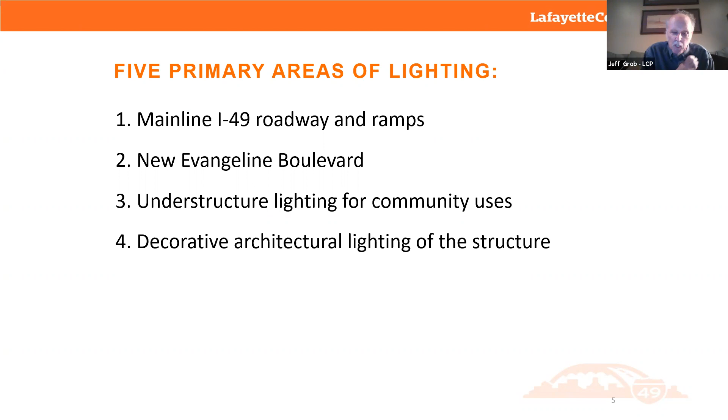We've talked a lot about decorative architectural lighting of the structure. One of the things that a signature structure allows itself is to be enhanced even further with a signature lighting scheme, and that can be done to further augment or highlight the context in which it sits.

I've seen signature bridges used for all different kinds of purposes and lighting purposes throughout the year, different seasons, different ways of doing it. So it can be a real attraction for the community, and it's a decision that needs to be talked about today. But the decorative lighting of the structure is important.

And finally, there's going to be something else that's going to need to get lit too. We don't know what it is yet, but there's probably going to be something else, and we want to have the ability to do that as well.

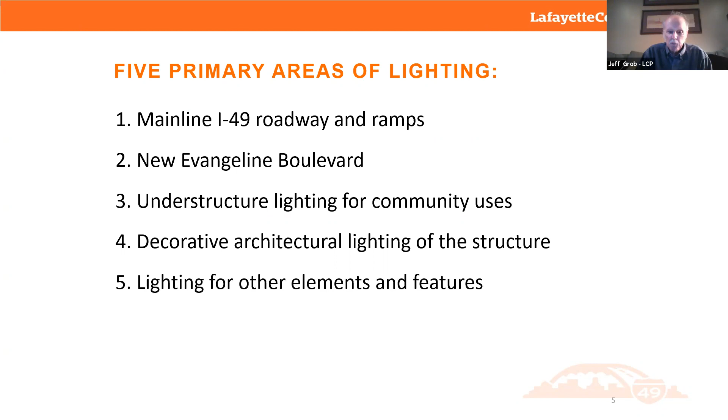So why is lighting important? Let's talk about this for a minute. Besides the viaduct itself, lighting probably has the single biggest impact on how this corridor will transform itself and how it will appear to all of Lafayette and visitors to Lafayette. So let's take a look at this.

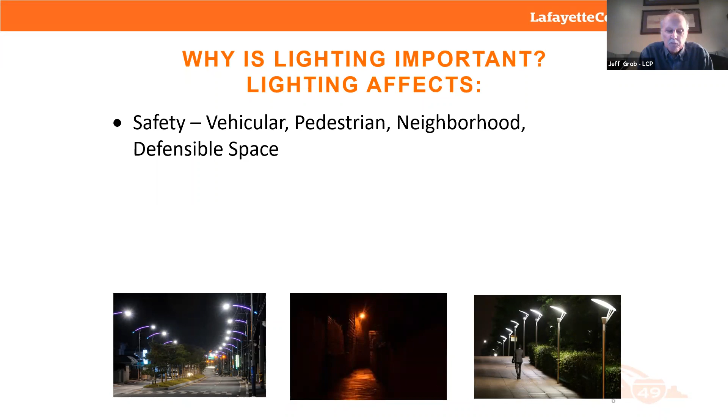The biggest reason, of course, is safety. You want to light it because you want to be safe for vehicles and pedestrians. You want to keep the neighborhood safe, and you want to have defensible space. Look at those 3 images along the bottom there — you can see why I purposely put that one there in the middle. That's not lit very well, and that's the reason why you want good lighting.

You want good lighting so that everyone feels comfortable in the spaces we're going to create in the evening. It's also for vehicular safety and neighborhood safety, and you have what's called defensible space.

Next, it creates place. Lighting standards and the equipment you use create identity, it creates context. And if you use equipment that is applicable to the community, it creates context.

You have more inclusion. With better lighting, you'll increase mobility and accommodate more people across the board. It's not just for cars, it's not just for able-bodied people, but it's for everybody. And this is very important — it creates a sense of place, and this very well could be important to the stakeholders here at hand.

The quality of light — we're going to talk about this just a minute — but particularly if you can enhance your nighttime experience with true color rendering, you have a better quality of life. We all know, and I'm certainly glad, that most places, including Louisiana, have gotten away from using high pressure sodium, which is awful — that yellow stuff that makes you look pretty sickly at night. Everybody's going now to LED. This project will use only LED, for both energy purposes and for color rendering and efficiency purposes.

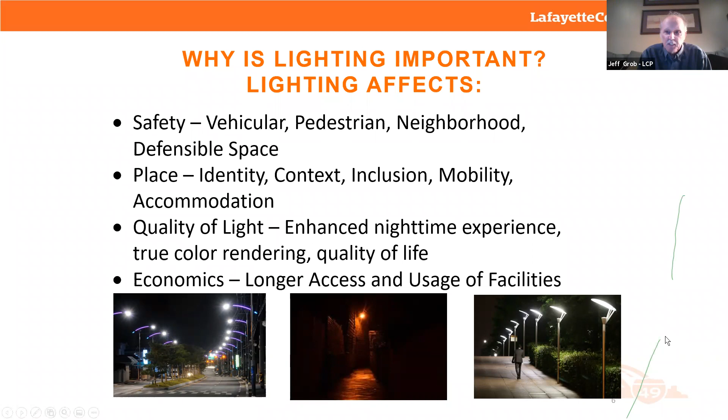So this is why lighting is important, and this is why we're going to talk about it for a minute. So we have some planning here.

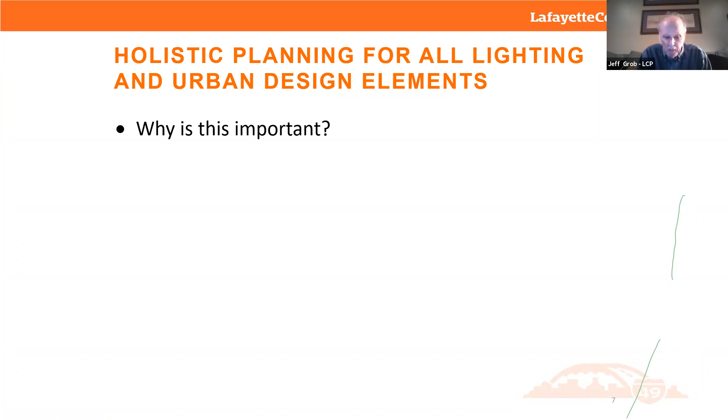So why is this important? Well, it's got to reflect the community's aesthetic and preferences. This is going to be the crux of what we'll talk about in this section. The equipment we're going to show are only options, but you're going to see the difference between doing nothing and doing something. The equipment, if you're trying to create a sense of place and an identity, particularly for a new urban boulevard, you want all components to talk to one another and reflect the community's aesthetic and preferences.

So at the end of all of this, we're going to ask for your opinions and have you talk amongst yourselves to see what other people think. The point is to see if there's something here that can add to the experience you're creating in the new urban corridor for the Evangeline Boulevard.

It's also important because you've got to have ease of operations and maintenance. The Lafayette Utilities System, LUS, operates and maintains all this stuff, and we've heard from them loud and clear that they need it to be as maintenance free as possible, as we all do. I just changed the light bulb in my kitchen and didn't want to get on that chair, but I had to do it.

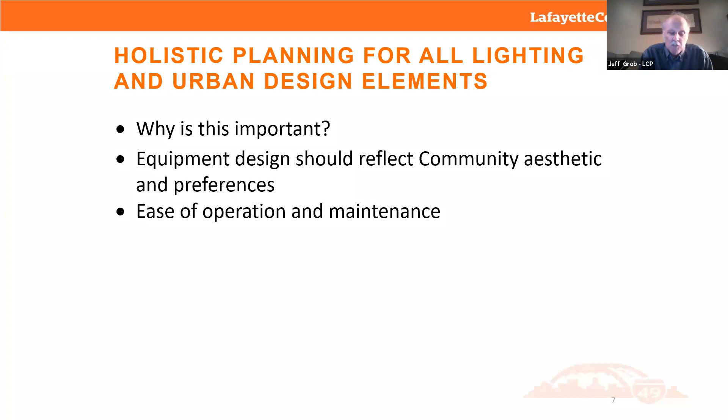Finally, it should be compatible with the mainline structure architecture, which we spent a lot of time talking about, and the other urban design elements in this project. There's a lot of thought going into what this whole thing's going to look like. You have a once in a lifetime opportunity to create a whole thing, and all the bits and pieces should talk to one another.

There has to be holistic planning, particularly with lighting and street furniture. You've got this viaduct structure in place, and all these things want to hold hands and talk to one another such that it looks like it was thought across the board, making sense as a statement together.

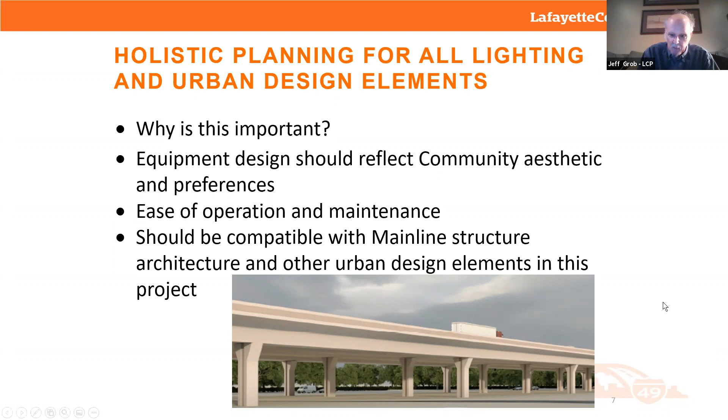Next slide, please. So what are some possible scenarios and outcomes? Go ahead, Dan.

Lighting would be installed with no alternative lighting selected. We're going to talk a little bit about what's the default here, and this is going to be the big question of the evening. If we don't have this discussion, and the consensus is that there's no preference for anything alternative to the standard, then the standard will prevail—because that's what standards are for. If there's no alternative lighting selected, then the standards that LUS has, which I'll show you in a minute, those would be the ones utilized on this project.

LADOTD, in conjunction with the local utility and municipality, is mostly only responsible for lighting the interstate. They don't light local streets, they don't light the state highway—it's all down to LUS. They energize, maintain, and own the lighting throughout the streets. Now, LUS is a wholly owned division of the Lafayette Consolidated Government, so city government tells LUS what to do.

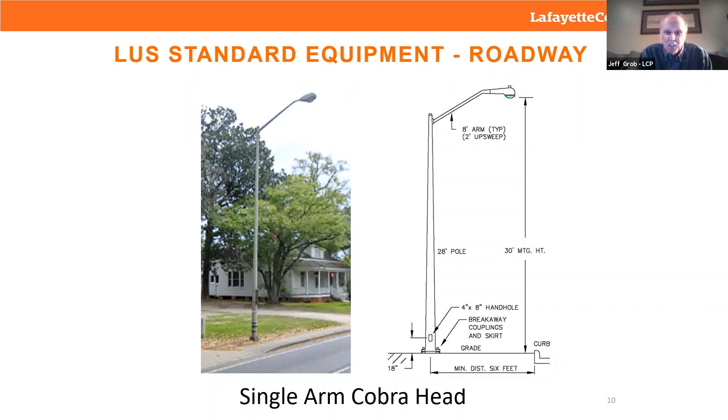Next slide, please. So let's take a look at LUS's standard equipment. You've seen it, you know it, you love it—this is the old Cobra head. It's all over. All the pictures, by the way, are screenshots from around town, and the picture on the right is from their standards. It's an aluminum pole with a davit arm and a Cobra head type fixture. That's it. That's called the Cobra head, single Cobra head.

You could also have a double Cobra head—this is a double arm Cobra head, same pole, just two arms and two lights. This would be used if you were going to light something down the middle of a median. We've talked about that, but we think the new boulevard would probably be lit from the edges, not down the middle, because the median's pretty wide. You want to get that luminaire out over the travel lane so you get good light distribution and photometrics on the ground plane.

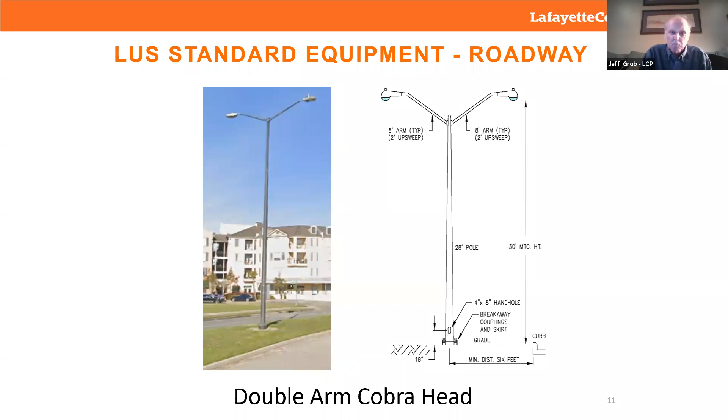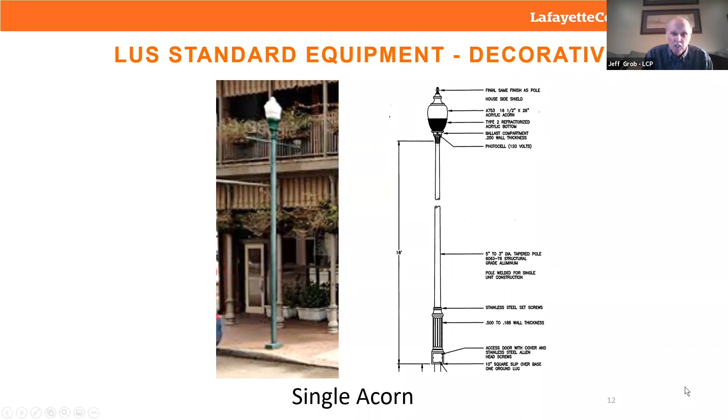LUS does have decorative lighting in their catalog. They have this acorn fixture - this one is on Jefferson Street, and it's decorative equipment. It's in their catalog, they stock it today, they use it today, and it's an option. Finally, they have the same acorn fixture as a double option. So that's what LUS has today - that's what would be implemented if no other decisions or requests were made to do something else.

It's very important to understand, because we need to hear from you next week after you've talked about this. We need to hear from you if you think this is something you might ask the city for, or suggest it's worth creating a different sense of place - it's going to cost money, but it'd be something where you could use alternative lighting fixtures. We'll go through a quick sampling of the many possibilities.

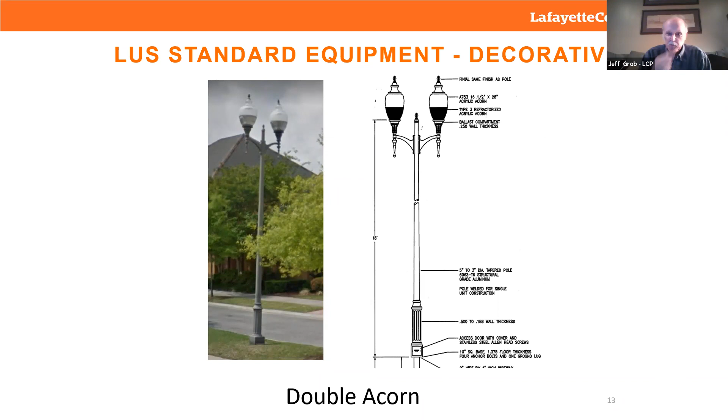Let's talk about what alternative options might work. There's a plethora of alternative lighting fixtures out there. Let's go through a sampling, and please understand these are by no means the only ones available. Keep in mind you've got the LUS standard stuff, and then you've got the potential for doing something else.

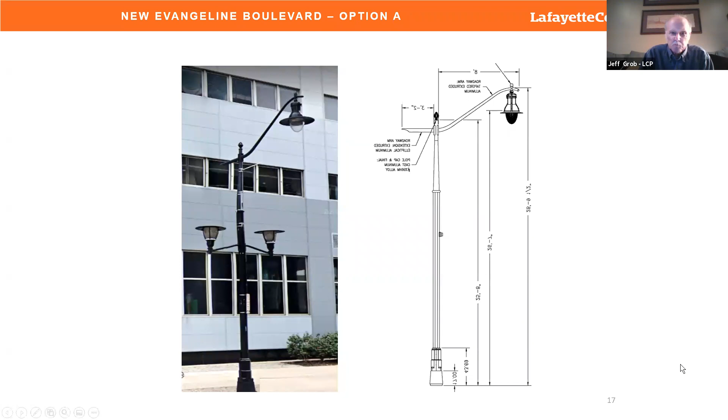Here's one that might get your attention. If you really wanted to create a special look for that boulevard, let's go all out and get something really different - you probably haven't seen this before, but I offer it for your consideration. If you used this flanking both sides of the boulevard on the edges, it would create quite a dramatic statement as you're traveling north or south from 2nd and 3rd Street down to downtown, or coming up from Johnson Street. You'd get a line of these going, and if it's the right aesthetic and the right look for everything else being suggested, this might fit in as well. This one can also light both roadways and pedestrian spaces with a lower fixture off the back of the pole.

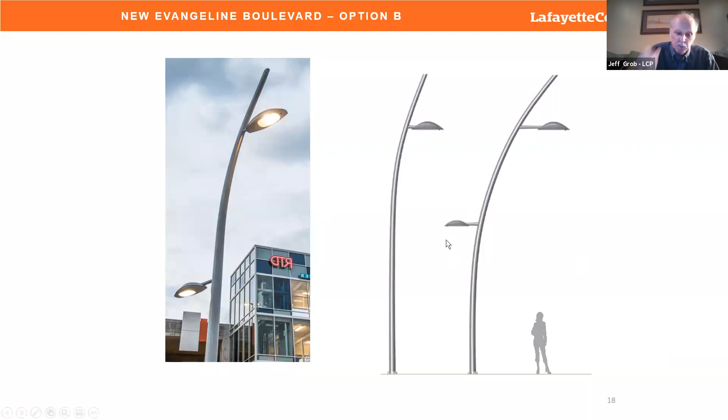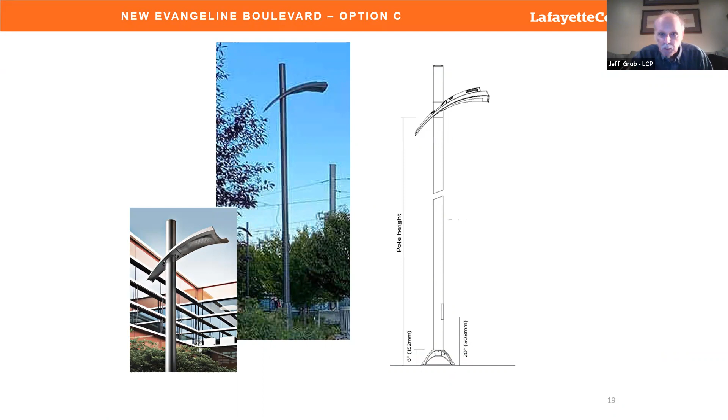Now let's go on to some other lighting areas we need to talk about. At some point, if there's ever an agreement for joint use development underneath the structure for various community uses, some of those uses might require lighting for safety or extension of use time. So let's move on.

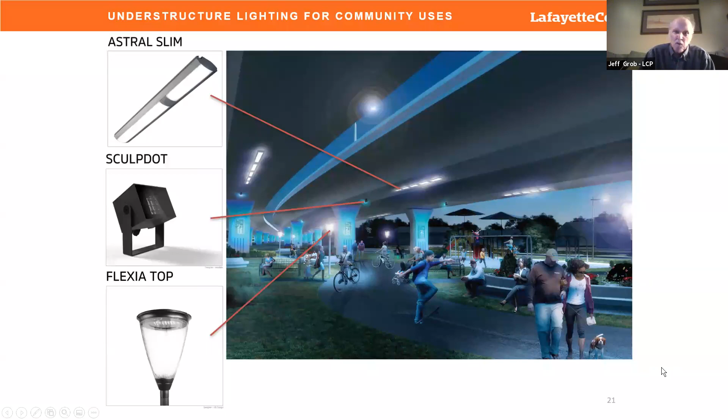But that's only going to happen if there's an agreement in place for someone to fund it, operate it, maintain it, and make sure it doesn't go bad. So all of that has to happen first before any of this happens. You have to design, build, operate, and maintain as a partnership with multiple entities before this stuff happens. And this is going to be the topic of the next section of today's discussion.

Then we also have the possibility of lighting the signature structure itself. We've seen all kinds of stuff done for highlighting signature structures, viaducts, decorative long span bridges, and so on. This is limitless. You can have a lighting design, a lighting program that follows the seasons, announces special events, even spell out your name if you want. But the point is, if you have a signature structure, you're not going all the way out unless you utilize it by highlighting it with architectural lighting.

This is something the DOTD does not do as a matter of course. It would have to come from the city and others to say this is worth it to us, this is necessary, thank you for the big bridge, and we're going to pay to light it up so it really shines. Again, the potential is there, but it has to be something you all think is important enough to dedicate time, effort, and money to make happen.

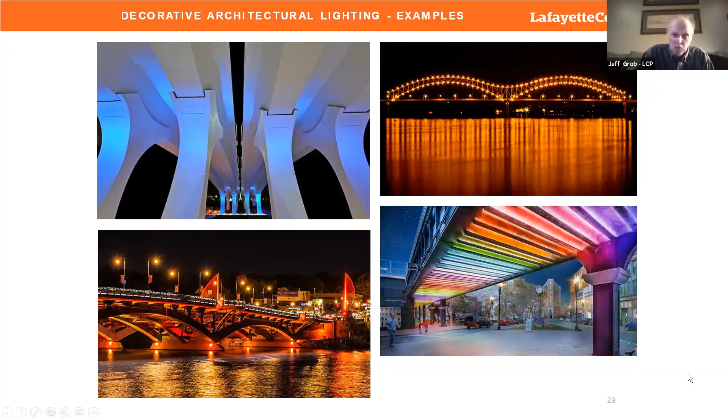And then finally, we don't know—we're still in the planning purposes. There's going to be something else somewhere that's going to need some lighting. I just offer this next slide as three examples. Who knows what it is? There could be a piece of sculpture in the middle of a field or an infield, say it's not on a road, not under the bridge, not on the main line, but you still need to light something.

It's got to get lit, but it's going to have to be done through one of those joint use development agreements. Who's going to design it? Who's going to install it? Who's going to take care of it? And who's going to fund it? Those agreements have to be in place before any of this happens. But there's potential for that to happen if everyone deems this important enough. And that's going to be the big question we have next.

So let's go to the last one, Derek, and see what we got here. What do we need from LCAG? This is the big question. I was going to say it's the million dollar question, and it kind of is. Everyone's going to have to think about and prioritize, look to yourselves and talk to your constituents, and see what we think is necessary, what we think is important to us, where we'd like to ask for some money to be spent, is there money to be spent—these are the kinds of things.

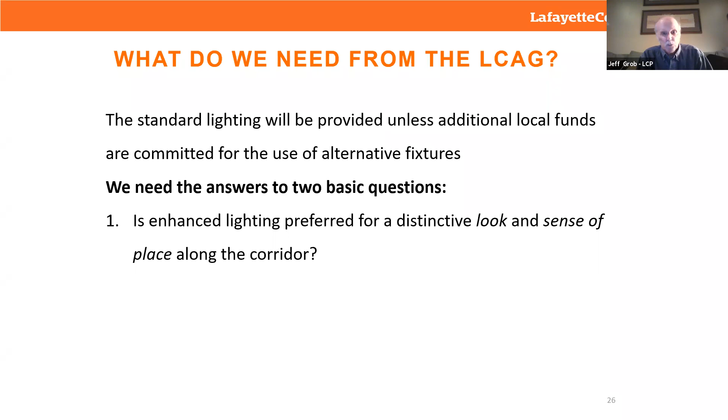And is that additional cost, this is part of the same question, above the standard, a worthwhile expenditure of city funds? That's something that I can't answer.

That's something that you have to talk amongst yourselves, and then go to the city or petition the city or talk to somebody and say, look, we think this is important because of reasons A, B, C, D, X, Y, Z. Here you get a once in a lifetime opportunity to create a holistic and cohesive urban boulevard corridor, and all the pieces have to talk to one another.

So the lighting is particularly important in that, and we need to consider it a very important aspect of it. I think I'm done. That's my story, and I'm sticking to it.

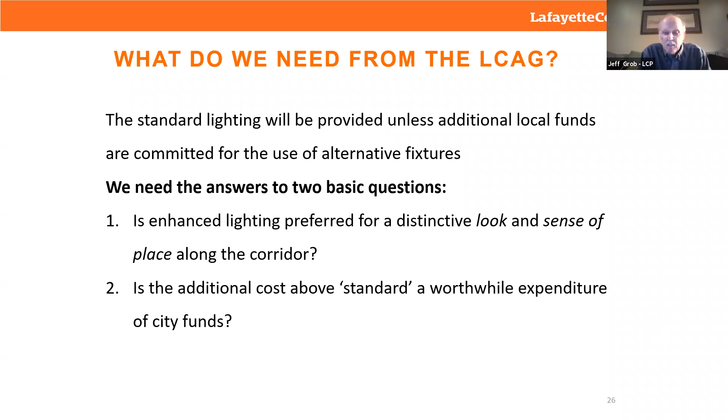One of the things that we wanted to start a discussion on is just thinking about the understructure uses and starting to show some drawings that just start to look at objects and uses from a sense of scale, and just to start discussion purposes.

So along this, we kind of identified these four areas that we'll do an enlargement of and have some discussion about. Some of them focusing on the boulevard, and then the other two more associated with the Willow interchange on the south and north side. Derek, next slide, please.

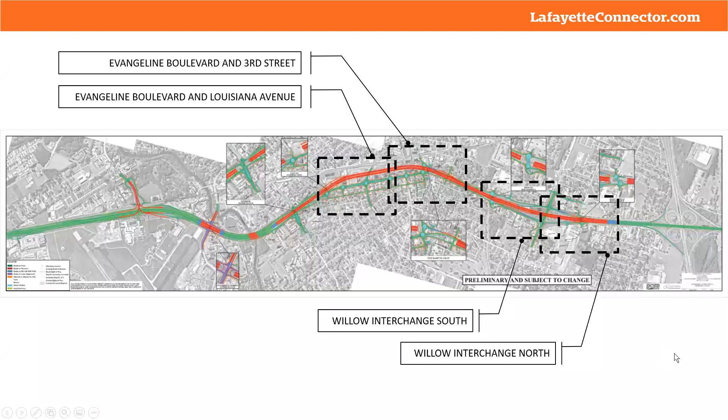Say the question again, I'm sorry. Samuel asks, are the lighting standards set by LUS or DOTD? LUS, but they're compatible with what DOT would use. They're really one and the same. Thanks, Jeff. Okay, I'm sorry to interrupt, Josh. Go ahead. No problem, no problem at all.

So, again, just to state again, this really isn't a final design direction. These are just kind of discussion diagrams and drawings just to start to show how objects and ideas can start to fit under structure. So taking the roundabout concept and seeing how that starts to relate to some of the existing buildings, the residences that will remain, and then looking at some opportunities for redevelopment. And that's kind of illustrated in the purple.

And it's not that all of these would be redeveloped. We just wanted to start to think about that there are areas that do have potential, and where might those occur. And then under structure, we started with a really basic ground plane, thinking about how the multi-use trail would move through the space, how it would start to engage at intersections, how bikes and pedestrians would move across those and through. And then thinking about how we could start to reinforce that with some berming, some simple weaving of plants and aggregate, thinking about opportunities for stormwater capture and slowly releasing that, and just start to see how all those things could come together to create this really visual aesthetic along that.

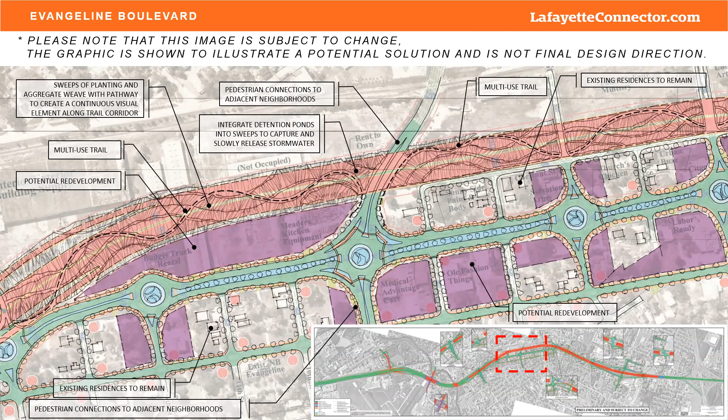So the next slide will start to think about what's the next layer on top of that. Can the understructure be utilized for some parking to help support these redevelopment areas? Can we free up some of that space associated with parking and utilize the structure to have covered parking right adjacent to those areas?

I'm also thinking about some amenity zones. Is there a potential for a farmer's market? You can kind of see that in one of the areas. And it's not that we're saying this is exactly where we think the farmer's market would go. It's more the idea of how a farmer's market type setting could occur and could be placed under the structure, whether it's this block or the block down. That's part of that joint use development, and that's for discussion at a later time.

This is more thinking about, do some of these fit? Are these good things to move forward?

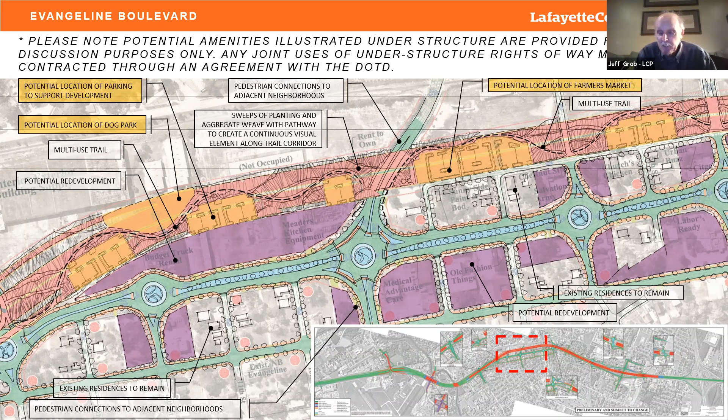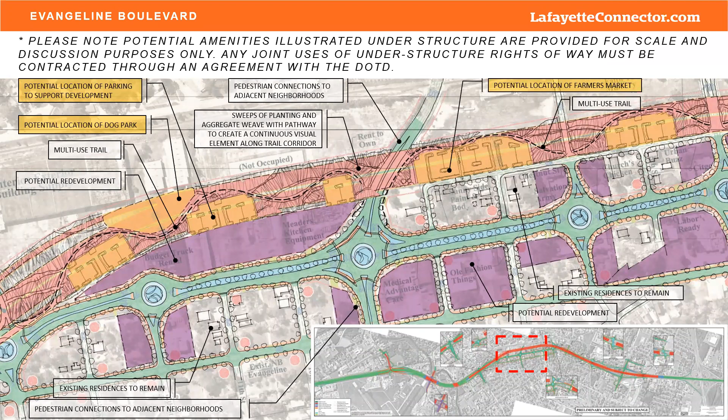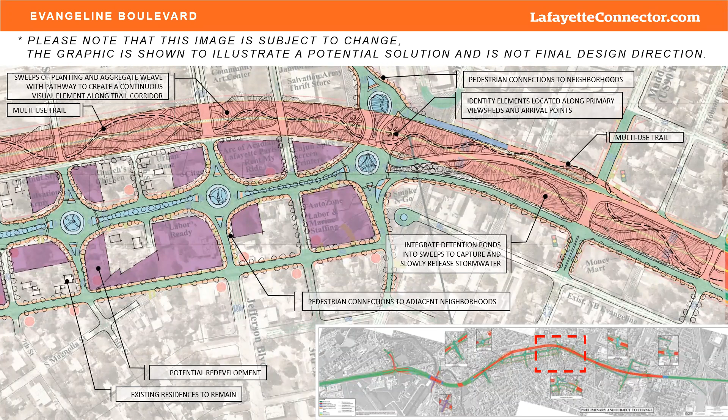Sure. I think, Derek, we can move up to the north on the next slide. So this just shows the continuation of that, again, looking at areas where we see potential for some possible development. And then again, how that weaving through of that trail, understanding that there's some opportunities by those asterisks for these identity elements to potentially happen and occur. And Jeff alluded to that from the lighting of these specialty objects and how those could start to create gateway identifiable markers throughout the corridor.

And then the next slide starts to look at potential for popping in of some support elements, whether it be parking or some other uses that really start to facilitate the development in those areas, thinking that they could be a little small, but utilizing some possibility of some understructure support for those development parcels.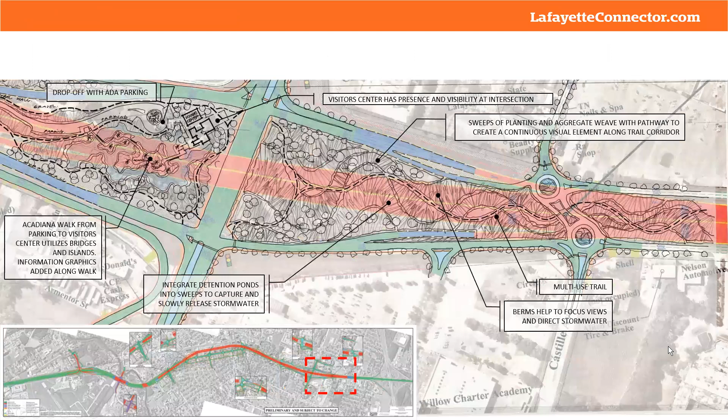So the next slide will be the continuation of that, to the north. We looked at a couple different options and ways we could provide accessibility to this space, and it was really difficult. So we wanted to use this more as a landscape statement in this area, really amping up ideas of planting and aggregate, and stormwater collection. It can be a landscape statement that starts as you're coming down off the interstate, setting up that area for what's perceived as the visitor center on the other side.

So again, just starting to spatially think about how things would fit, how people would move through the space, thinking about where our crossing points are, and where it makes sense to mitigate and alleviate and provide those view angles as well.

Derek, did I miss anything on that, or? I think you're muted, Derek. All right, I couldn't unmute myself.

No, I think you covered it really well, Josh. A lot of concepts in there, most of which derived from the neighborhood meetings we had up there, where we had some very engaged folks. They did emphasize the natural area up here, that there weren't many natural areas they could easily visit, due to some lack of vehicular access and other issues. Did a fine job, good, well covered.

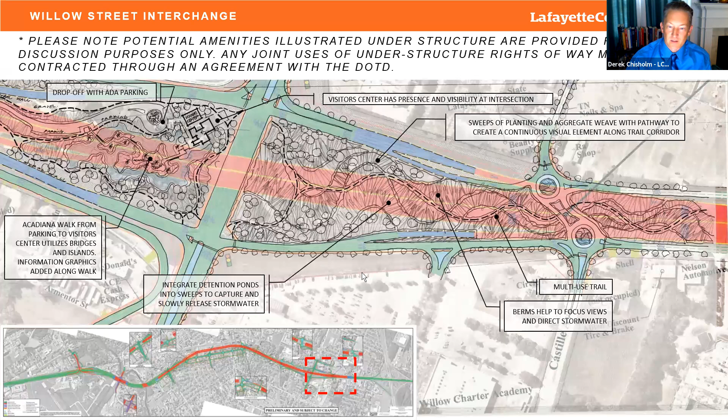Looks like Matthew has a question. So I'll bring that up. Yeah, these—Matthew asks, oh go ahead Matthew. I'm sorry, no, go ahead Jennifer. No, I was just going to read your question: will all of these understructure aspects be funded by the project budget?

Derek, you might be able to speak to that. It's not really absolutely defined yet. As we discussed before, FHWA really holds the purse strings as much as DOTD does, and will fund elements serving a transportation function, which typically covers some modicum of landscaping and would cover something like an understructure trail. But there's an upper limit to that amount of landscaping, not defined in policy or code, just worked out over time. They would not fund something like a visitor center. The placement of the visitor center—well, actually there's a caveat there too, because the project will displace the visitor center, so there's a real estate relocation function I may be glossing over. To pick a better example, the basketball courts down there—FHWA is not in the business of building basketball courts. What I've seen in my experience is that the state and federal agencies together would leave a suitable spot for such, grade it out, potentially serve it with necessary utilities, and stop there, focusing on transportation functions, with the other things funded by any combination of local government, regional government, downtown economic development type entities, et cetera.

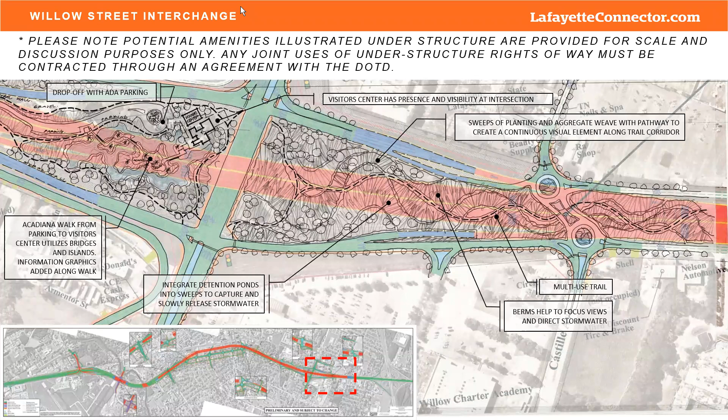I think that was the last slide on these, Derek. I'm sorry, that's the same one, right? Yep, that's the same one. So if there's any other questions on this, we could move on to the green infrastructure if there's not. Sounds like we should move on. It's very closely related. Yeah, let's go ahead and move on.

So one of the features you see under there is stormwater retention. A lot of folks are familiar with stormwater retention associated with highway projects. You see it in retention or detention ponds in many cases. In some cases, it's underground in large conveyance structures.

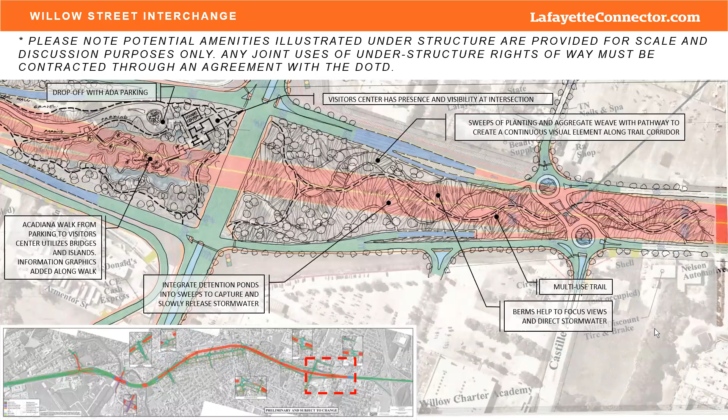So what we're going to talk about now is some conceptual ideas, CSS applications of different approaches to drainage. This is a very early part of the conversation, but we know that many of the stakeholders are eager to have it, so we want to put some materials before you and get your comments on them.

We've been having additional conversations. Gary Heitman, who's on the call, is leading the drainage analysis. He's been having conversations with DOTD about their drainage procedures, the hydraulics manual, and how that incorporates or can consider some of these techniques.

So the basic goals would be to support stormwater management, which we know is a significant need in the community, and to supplement traditional conventional gray methods with nature-based solutions, which can have numerous different co-benefits I'll speak to. One of those being volume retention.

Holding that first flush of rain. As you all know, a very large amount of rain can be managed by municipal systems and the Vermillion River if it's spread out across a long duration. So 10 inches of rain over many days can be managed, but 3 inches of rain that falls within an hour is very difficult to manage. Part of the concept is holding a portion of that, which would then be more slowly released as the system and/or the river catches up.

Many people have encouraged us to focus on native plants. That's been part of our methodology to date, and I'll speak to that in a moment. That would also influence the approach to landscaping, which goes well beyond the green infrastructure and will be touched on as part of these slides.

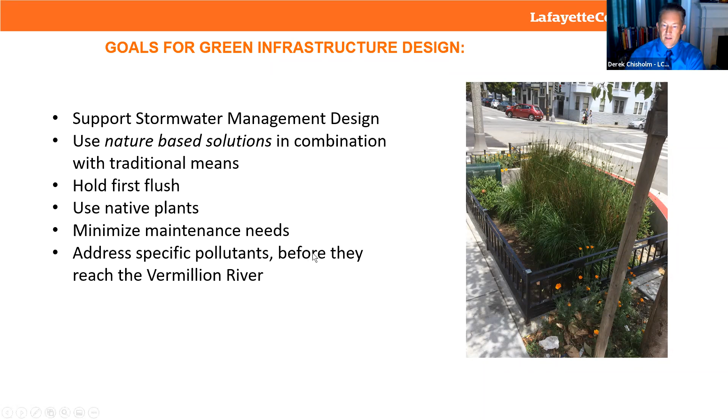So those are the overall goals of the program. We've only begun the analysis really, but it's not just an aesthetics-based approach. Our team is taking a very analytical approach to this. We'll be looking at soil conditions, flooding patterns, and using all these robust resources that have been locally developed, like the Native Plant Project, and DOTD's roadside vegetation management guidelines and extensive work on exactly how they like to have hydraulics and hydrology thought through. Those are all inputs in addition to what you're going to tell us in a week from now after reflecting on these issues.

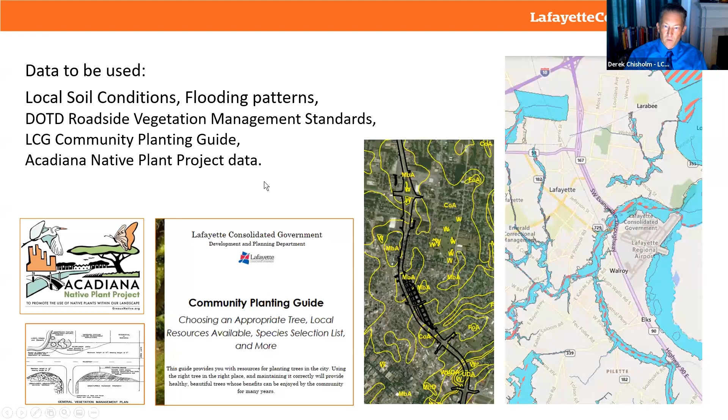So I'll just tee it up with a bit of a show and tell here. Case study might be an overstatement, but this is a Pennsylvania DOT project where they were entertaining green infrastructure.

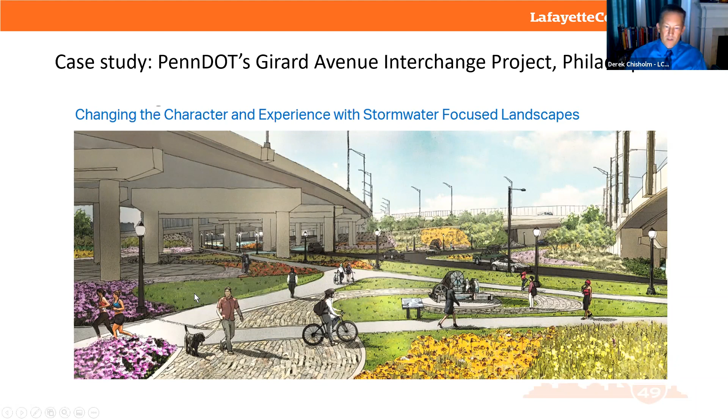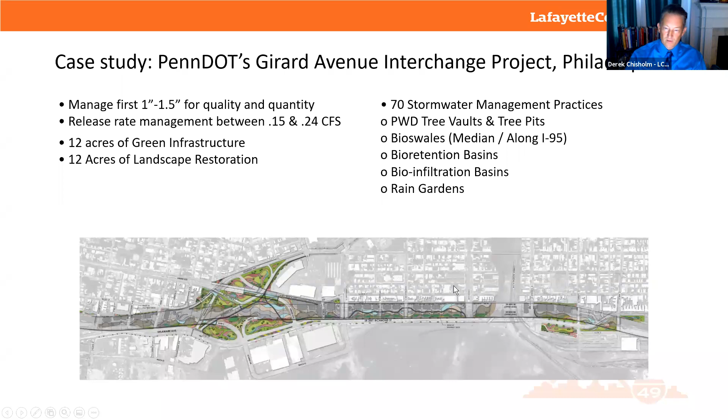And it started much like a meeting tonight where you're seeing conceptual drawings and just some loose talk about green infrastructure. It progressed from that to a level of preliminary engineering that was starting to detail the capacity and functions of each of these facilities, specifically outlining their locations, their capacities, and putting this together in a collective strategy, analytically. Then, of course, there is an aesthetic element to how that is laid out.

You heard Josh talk about sweeps of vegetation and stuff, and you see some similar lines flowing through this work, which includes sweeps of different aggregate nature, plantings, some topographic relief. And for this PennDOT project, we use a tiny bit of synthetic turf too, which I know is blasphemous to some folks, but it does help solve a problem under the structure in certain locations of low light and for certain play spaces as well.

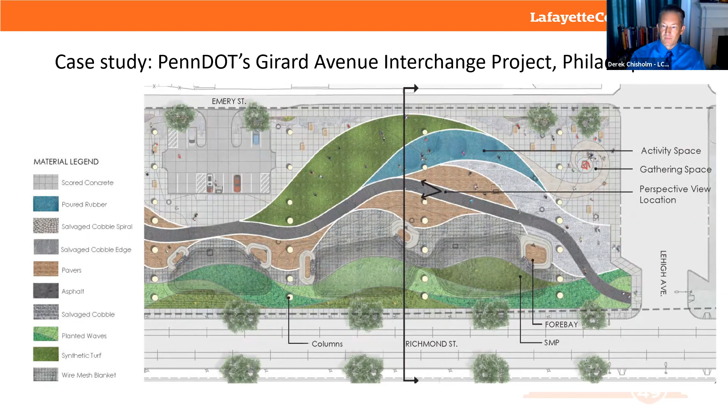So it went through preliminary engineering. And just to sort of prove up that this is possible, it's been built. Not all of it's been built, but a lot of it has. It is functioning and it is being monitored. So PennDOT has instrumentation put in so that they're tracking the water quality of the water coming in, as well as the water quality of the water going out. This is a typical practice if you can get some university involvement, especially, or get a grant. It's not a typical DOT function.

I also want to point out in these images that what you're seeing here is the surface treatment, the aesthetic element and the way that people interface with it. As you can see, this young woman and her dogs interfacing with the edge of it. But underneath here, there's a lot more work being done. There are large concrete vaults that are serving both a storage and a conveyance purpose. And they're also looking at many, many feet of specifically selected soil types that have void space to hold water and have certain water quality benefits as the water percolates through those and is cleaned to some extent, then enters the aquifer below.

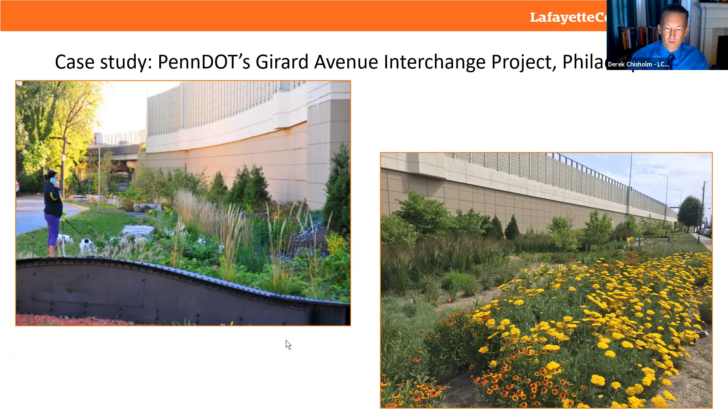So what would we do here? Well, like I said, it's green and gray working together. There's still going to be traditional, conventional approaches to this that would likely be manifest in the final solution. The underground and surface working together—it's not likely that we would have enough surface retention to significantly manage a good storm event.

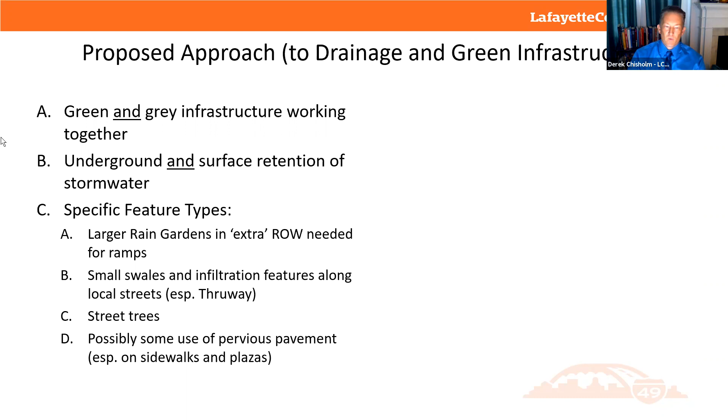And then what sort of features? So large rain garden type things, the likes of which you saw—large areas that to many just look vegetated, but there's some complex thinking going on underground. And then the surface just gives you a great opportunity for some plantings, beautification that comes there with. You get some nesting, some butterflies and other co-benefits that can be very delightful. Obviously this is a more cost-intensive treatment than putting grass down, so maintenance goes up, initial capital cost goes up. So we're not talking about 3.5 miles of these—we're talking more about specific nodes where it would be important to do something special.

Then there's smaller urban treatments, small swales. These also serve a great quality function. They serve a lesser quantity management function, but they're just great for beautification. In this case, it's also separating pedestrian and vehicular movements. And then so those are sort of primary focus treatments or features—some folks will refer to these as LID features. I think some of the local materials call them LID features, low impact development features.

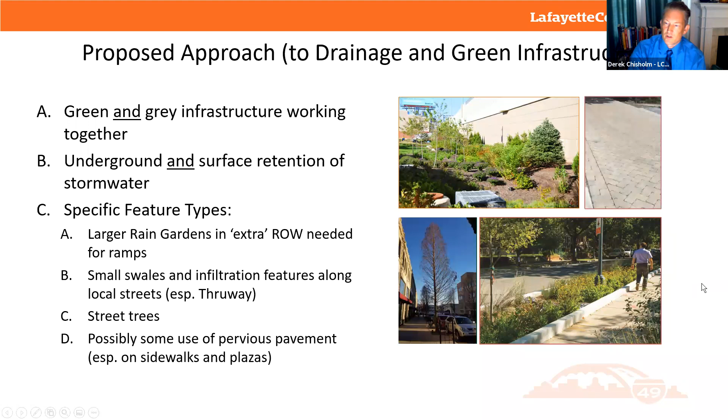So there's two other options, which are sort of second tier. One is just street trees themselves. Trees are very important—vegetation holds water and absorbs water. A tree of that size could be holding 20 to 30 gallons of water. And so after a significant rain event after a dry period, there is some capacity there, and there's obviously lots of other benefits. And then we could talk about some pervious pavement as well.

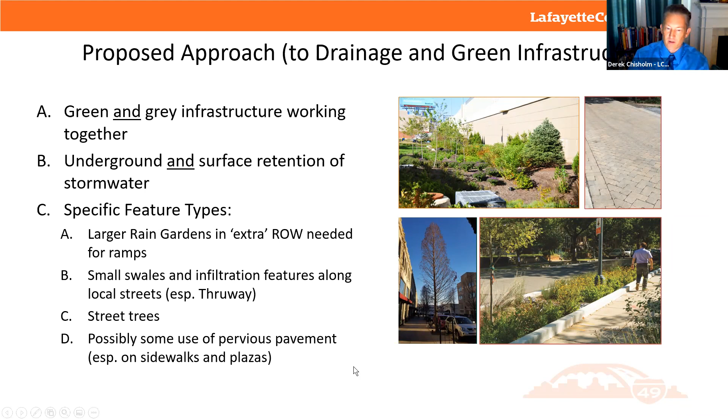We would not want to entertain that in any place that it would become an experiment or an operational challenge, any place with lots of volume, turning wheels. So even in a parking area, the turning of the front wheels can really torque the pavement and or the pavers. So maybe that's going to be a selective use in a small plaza or stretch of sidewalk, not likely something to be widespread in application, but an option. So we'll hear from y'all about your preferences for such, and perhaps that balance of options would change.

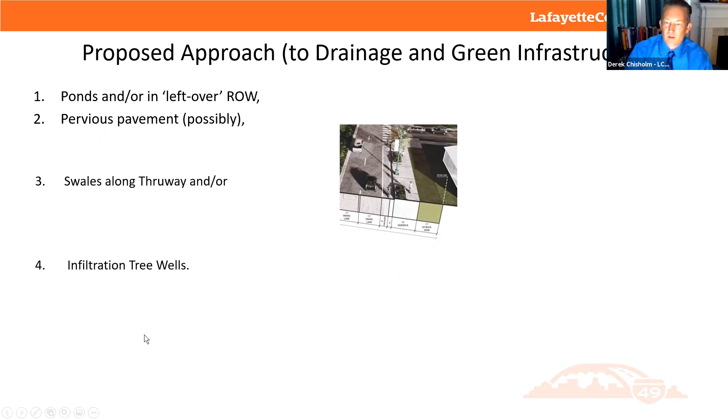So again, the ponds and pervious pavement, those are pretty well understood. I want to show you a little bit more detail about the more urban side of the treatment.

These are the things that people would certainly experience, even when they don't intend to go see something natural. They've just gone to get a cup of coffee on the thruway or the new boulevard.

So one of these is swales. You recall these being depicted in the axonometric views of the streetscape. Essentially it's a vegetated rectilinear space, could be curved space. What you have there is specifically engineered soils that have a retention ability and a cleaning ability.

You select different plantings and different soils based on what pollutants you're trying to deal with. Further into the process, we'd be looking very seriously at the TMDLs and the Vermilion. We know suspended solids and others are a primary concern, and there are specific treatments for those.

All of these would have some sort of overflow function as well, so that as this fills with water in a severe event, it's going to be able to overflow and discharge into the other system, so it wouldn't just spill out on the sidewalk.

Similar to that, if we went with the streetscape that had a tree well, you can do a pretty conventional tree well, but it's also becoming more commonplace now to do something with an infiltration function and an overflow, so you get a little bit more storage and it can be really good for the tree. So those are two urban treatments.

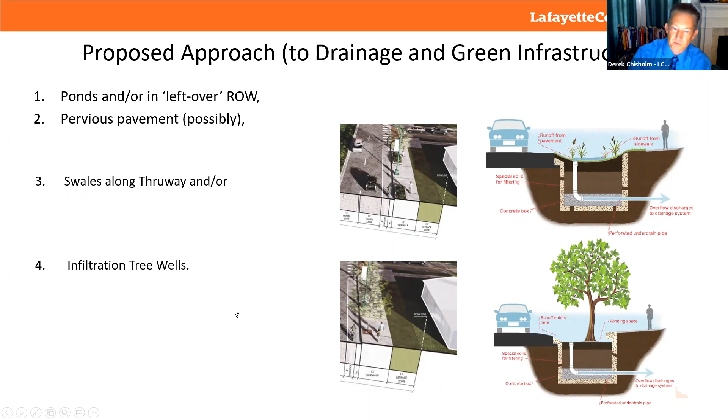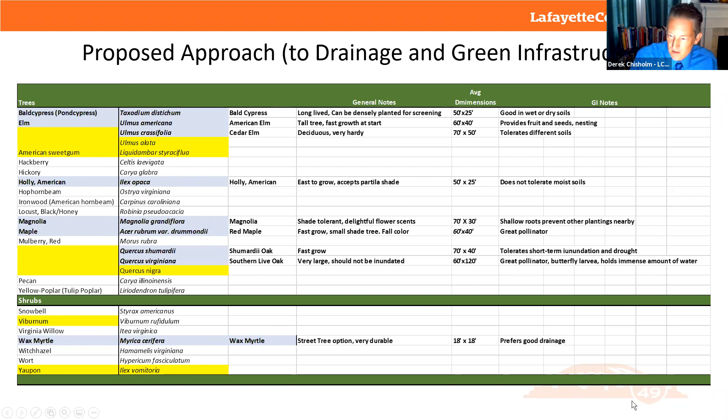Which I'm going to show for you now. So consider these, talk to folks about them. People do think about what trees they like and such. So we'd like to hear back from y'all.

This is obviously not the exhaustive list, this is just some ideas. At this point in the design, we're not going down to showing shrubbery or herbaceous species that would be used, just the big items which can have such a character-defining role to play.

So among these trees, you have a lot of very large options, but not all of them are suitable for open space, suitable for some of the stormwater areas, for where ramps are coming down and you have these leftover polygons or corners. We've got a little bit more space there.

Like I said, these are all selected because they're on all the right lists. No special permissions really required. They're native, and they're manageable in a variety of ways.

So we've got a number of landscape architects on the team. I'm not one of them, but I know a little bit about trees. Others know a lot more, and we'll make sure to scrub this and all the other plant lists to make sure that we're not introducing something that's going to drop a lot of litter onto a sidewalk, or would be weak.

We will be talking about the water oak. It's a little bit weak sometimes and can break in a high wind situation. We wouldn't want thorns near people, you know, simple concepts like that we will take into consideration.

But please think about these. The slides will come to you tomorrow, and you'll be able to talk to folks about whether they do or do not like the magnolia, right?

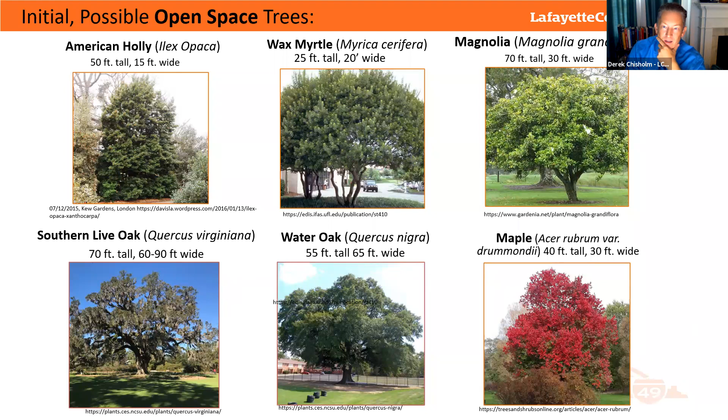Then for street trees, we have some repeating and some new ones, and a cultivar that I'd like to introduce and get your opinion on as well. Kelly, who's one of our great landscape architects, really suggested that these might fill in nicely to the palette here.

This is actually a newer cultivar, so it is not a native, but it is very similar to a lot of natives. So that one is not bolded, so you can think about that.

So these are possible street trees in different places, right? Some are more upright than others. And we would select those based on some cost and lots of other data.

Now these and the previous, that's just one approach to the landscaping and the trees specifically. There's lots of other ways we go about this. Some people love palm trees, some people love crepe myrtles. This is just one concept. Please consider it, and please consider the rest of the GI options that we presented. If you have clarifying questions, we might have some time for them today, but if you just want to voice your opinion, we can wait for next week.

Andy, you have your hand up. Do you have a clarifying question? Yeah, but it can actually wait till next week. I was just trying to stay away from things like water oaks and cypress trees because of the issues they present, in that the water oak has no real root system.

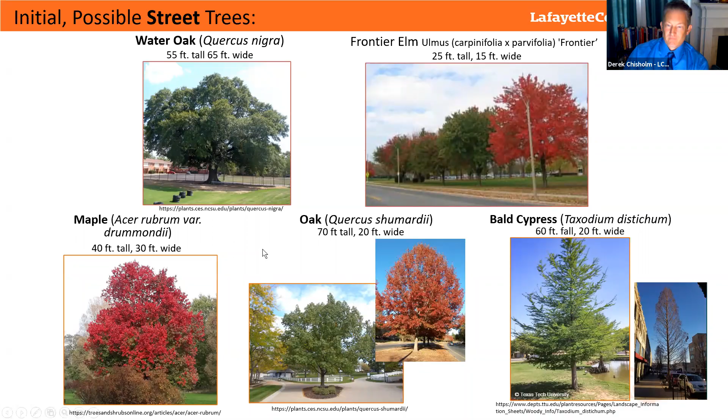I think we're going back to Josh now. So, intersections - we wanted to have a brief discussion about potential options for that. The next slide starts to get into that. The image on the left is from the preferencing, and we wanted to pull that forward since it was identified as a positive. So we wanted to bring that back to the forefront and talk a little bit about crosswalks in particular. The options on the right start to illustrate that.

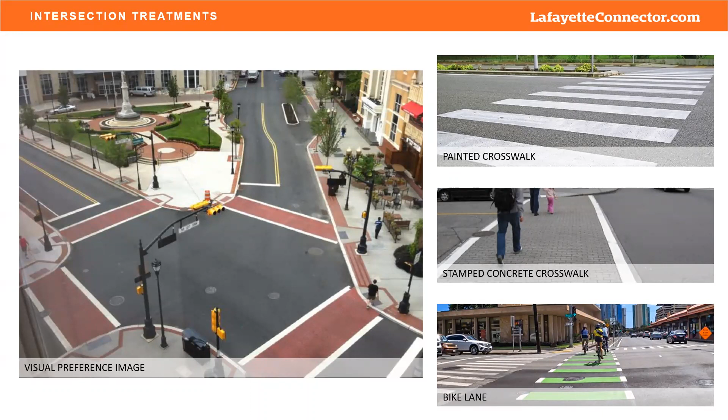Hey, Josh? Yeah, Jeff, go ahead.

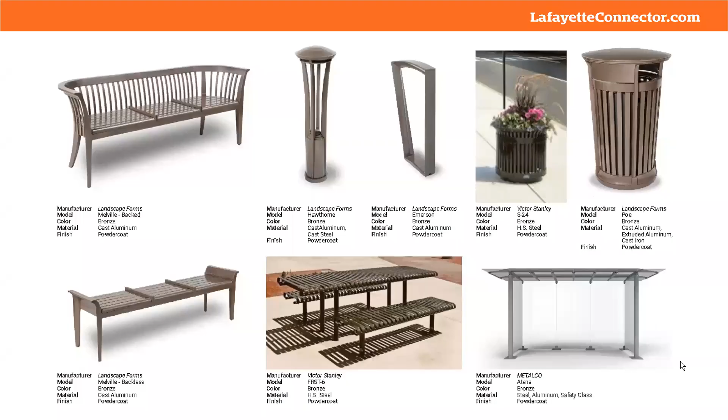So street furniture, we presented five options I believe it was last time. Got a lot of good feedback, and so we've kind of boiled it down to these three that we will be moving forward with. The first one is pretty similar to one we showed before. It's the graceful and muted, real sweeping lines, that muted tone. We had lighting before in this kit of parts, and we took that out and replaced it with a bus transit shelter, just to complete this kit of street furniture and leave lighting as a separate discussion element.

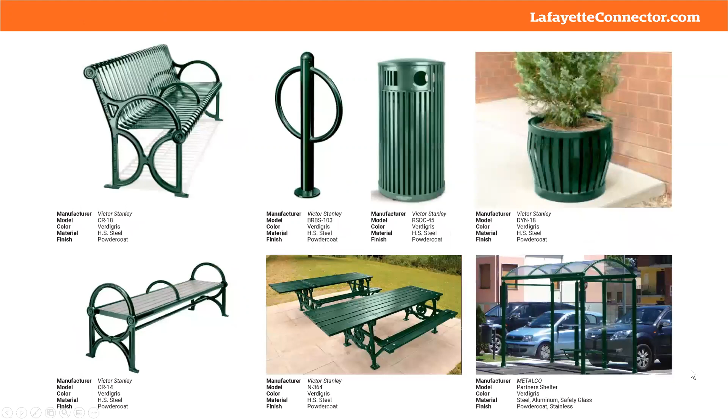The second one, before we had this and it was black. This is the traditional and rounded, and this was a black tone before. We had some comments about the black absorbing a lot of heat and it being a potential issue, so we switched that out for this green verdigris color that ties into some of the existing street furniture and light poles in the downtown area.

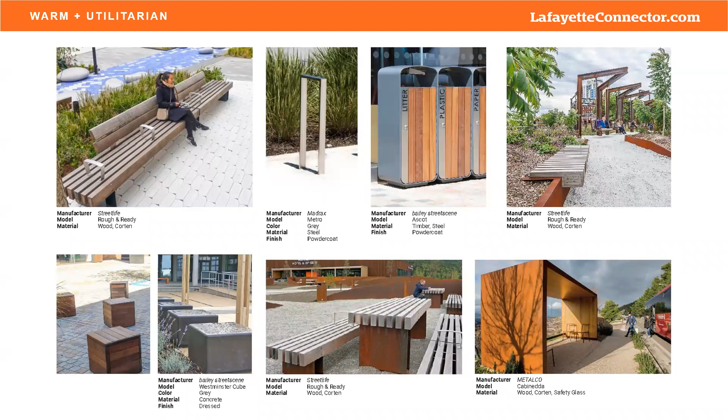And then the last one being the warm and utilitarian, again replacing that lighting with a bus shelter type. Not saying this is the specific shelter, but it's in that same family, kind of has that same language. So these are the three that we will be moving forward with as options.

Thank you, Josh. I'll encourage folks to think about this and think about the lighting options as a suite. We would like to hear some further direction if you have such in regards to these things. We will be rendering images of this project, and at some point we'll just have to pick something to insert, so if that was based on some modicum of agreement among yourselves, that would be great. Think about how these suites of furnishings could potentially relate to those lighting options that were shown by Jeff earlier.

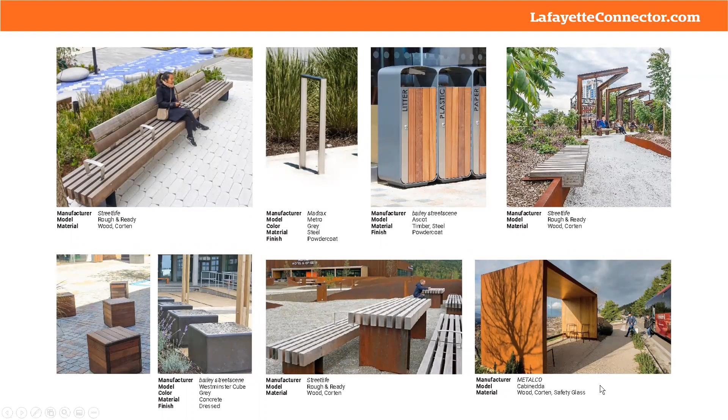Hey Derek, it looks like we've got a question from Matthew in the chat. Are you saying these treatments are dependent upon local funding? I would love to have green lanes and bike lane markings in intersections. We don't have that anywhere else in Lafayette. If DOTD doesn't pay for it, I doubt it will happen. I may have missed something you guys said, but it sounded like Jeff was saying that these intersection treatments—he may have been just talking about the bricks—but I wasn't sure if he was talking about the striping, if that would be part of the project funding, or if that's going to be another one of those optional things subject to local funding.

And Matthew, there may be others who know more than I on the call who are welcome to chime in, but I just don't think we know at this point. Obviously, those serve transportation functions and safety functions. The federal government's embrace of the green paint is subject to local permissions, and Lafayette has obtained that permission. But it's not typically an FHWA funded enhancement.

That being said, things are changing all the time, and the complete streets focus at all levels of government is very strong and getting stronger. It would get stronger still with the pending federal legislation. So I just don't think we know yet. It's a fine question and one that we need to answer for the project and for y'all.

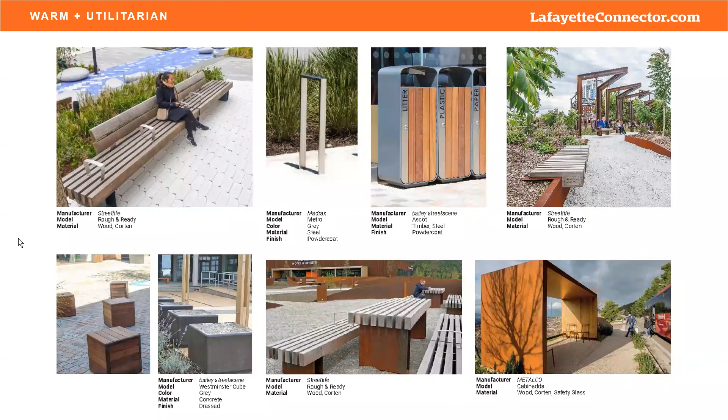Derek, it looks like Matthew has a follow-up.

Yeah, I typed it in the chat, but the reason I keep asking about whether this is going to come from project funding or local funding is I feel like we're being presented a suite of choices here, but without knowing whether those choices are feasible from a budget standpoint, it makes it really hard for me to feel like this process is useful, or that it's going to lead to any of the stuff you guys are presenting actually happening. So I'm kind of just wondering, why all these designs were put up if it's still a question of whether or not any of this will actually get funded.

Matthew, it's Jeff Grobe. Let me answer that at least a little bit. I think what we're trying to do is offer you the realm of feasible possibilities. Now, that requires you to prioritize what is most important, if any of this stuff is important to you, and then you've got to go advocate for it. Because if it becomes a local funding issue, you've got people in town, you have to gather some support for it and go get the money, or at least bother people enough so that it becomes important to them because it's important to you. But if we don't present the alternatives, then there's no discussion of what else is possible to enhance this project such that it becomes the best that it can be.